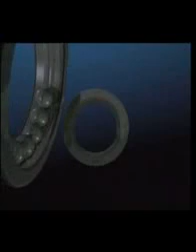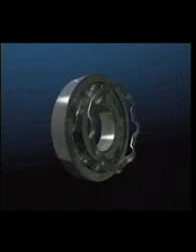The deep groove ball bearing is the most commonly used bearing in industry, being ideal for light loads and high speeds. It consists of an inner and outer ring and a set of balls separated by a cage. This bearing can accommodate radial and a combination of light radial and axial loads.

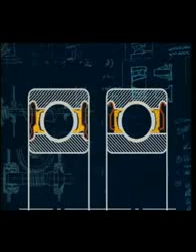The bearing can be supplied in an open condition or with 1 or 2 seals or metal shields. Completely sealed or shielded bearings are pre-greased during the manufacturing process and cannot be re-lubricated. They are commonly used in small electric motors, gearboxes, conveyor support rollers and similar equipment.

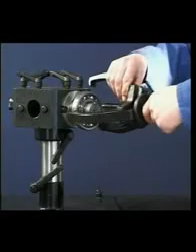For the dismounting of deep groove ball bearings, a number of methods are available depending on the setup of the bearing. The most frequently used method is for bearings with an interference fit on the shaft. For this application, a jaw-type puller can be used. The jaws are located behind the bearing, and by rotating the puller and the outer bearing ring, the bearing can be easily dismounted from the shaft, with minimum damage to the raceways.

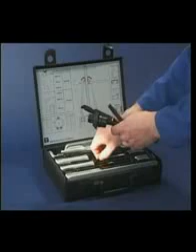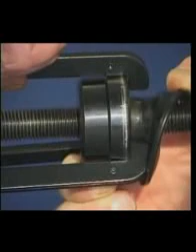In applications where it's not possible to get behind the bearing, SKF provides a special puller kit. Select the parts according to the chart on the lid of the box. The puller is assembled by placing the specially designed tips between the inner and outer raceways, ensuring pulling forces are on the outer bearing track. With this method, the bearing should never be reused.

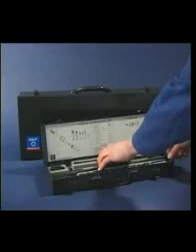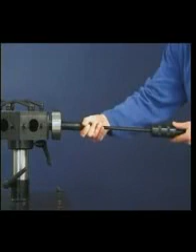In applications where the only access is through the bore of the bearing, SKF provides a split collet impact puller. The correct collet size is obtained from the chart which is fixed to the lid of the box. The collet is placed through the bore of the bearing and expanded by tightening the collet nut. The slide hammer is then screwed to the collet and the bearing dismounted by impacting the slide hammer against the handle.

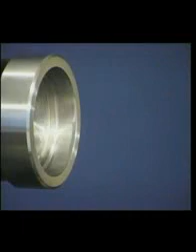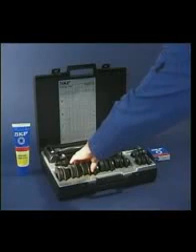The most common way of mounting small deep groove ball bearings is in a cold condition, using the special SKF fitting tool. The correct parts are identified from the chart on the inside of the toolbox. Do not remove the bearing from its box until everything is ready. Before mounting deep groove ball bearings, care must be taken to ensure that the shaft and housing are not damaged or worn. The use of some light oil on the shaft will assist the fitting.

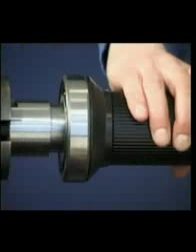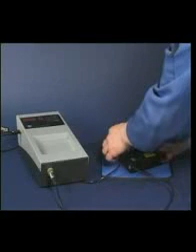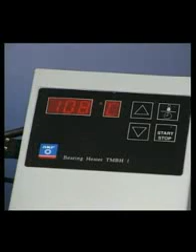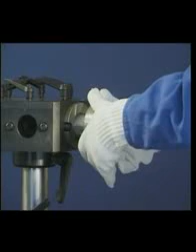For medium to large deep groove ball bearings, heat is often used to expand the bearing inner ring. SKF provides a wide range of bearing induction heaters for this purpose. In this instance, the Scorpio induction heater is used. Do not heat the bearing above 110 degrees centigrade and always use protective gloves. The bearing should be held against the shaft shoulder until it cools sufficiently to grip the shaft.

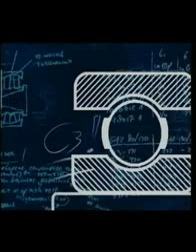When mechanically mounting deep groove ball bearings, damage to the bearing can occur if the mounting force is applied to the non-locating bearing ring, as this would allow the shock load to be transmitted through the rolling elements. The force must always be applied to the ring with the interference fit.

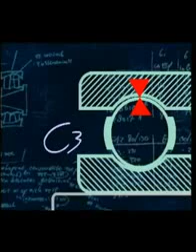Deep groove ball bearings are supplied with a range of predetermined radial internal clearances. Normal clearance is not marked. Bearings with a greater than normal clearance are marked with a C3 mark. Always make sure the replacement bearing is identical and has the same internal clearance as the original.